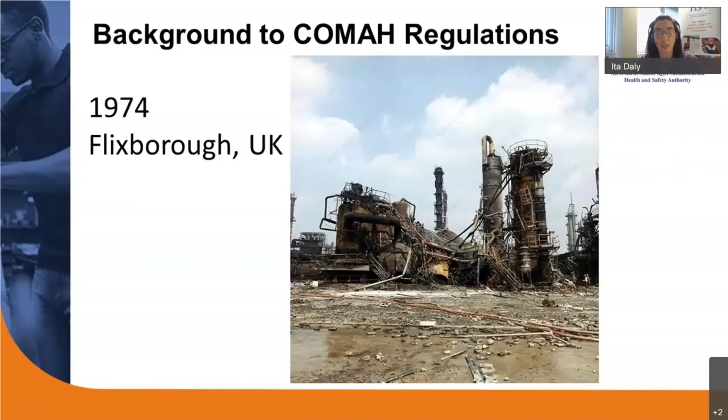In 1976, at a chemical plant near a town called Seveso in Italy, a dense vapor cloud containing dioxin, which is both poisonous and carcinogenic, was released, resulting in more than 2,000 people being treated for dioxin poisoning and the contamination of 10 square miles of land and vegetation.

Events such as both of these incidents prompted the adoption of legislation on the prevention and control of such accidents in Europe, and hence came the so-called Seveso I directive. The Seveso I directive was then amended in view of the lessons learned from later accidents, such as in Bhopal and Mexico City, and this brought about the Seveso II directive, which introduced new requirements for land use planning.

So the protection of residential and other populated areas likely to be affected by a major accident is a key aim of the Seveso directive. It also covers the safeguarding of environmental receptors. The directive sets out that member states should ensure that the objectives of preventing major accidents and limiting consequences of such accidents are taken into account in their land use policies.

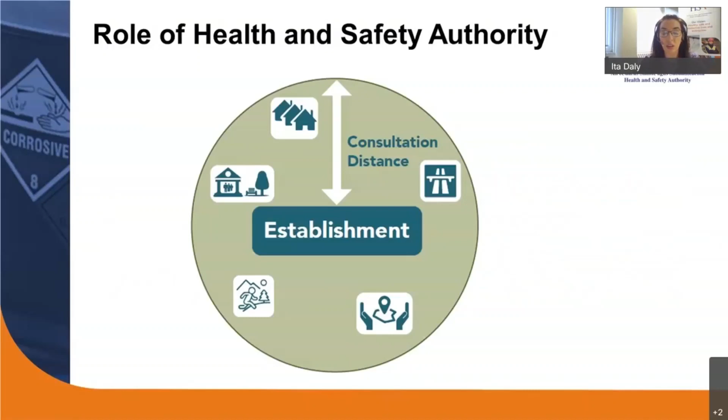I spoke about the directive requiring appropriate distances between establishments and certain receptors. It requires the HSA to set and review a distance around each establishment, called the consultation distance. In essence, it's a protective zone around a COMAH establishment to ensure the risk to human health and the environment is minimised, especially for the developments I outlined already - residential areas, buildings and areas of public use, recreational areas, and so on.

Once this consultation distance is set for an establishment, it then must be formally communicated to all relevant planning bodies. In 2021, the consultation distances for all establishments were reviewed and updated, and details of the revised consultation distances were sent to the relevant planning authorities and to site operators in the form of a GIS file.

It is important to point out that this risk figure is based on the inventory provided in your COMAH notification. Therefore, if there are modifications on a COMAH site, including changes to the quantity of dangerous substances, it is vital that these modifications are communicated to the authority through the significant modification process.

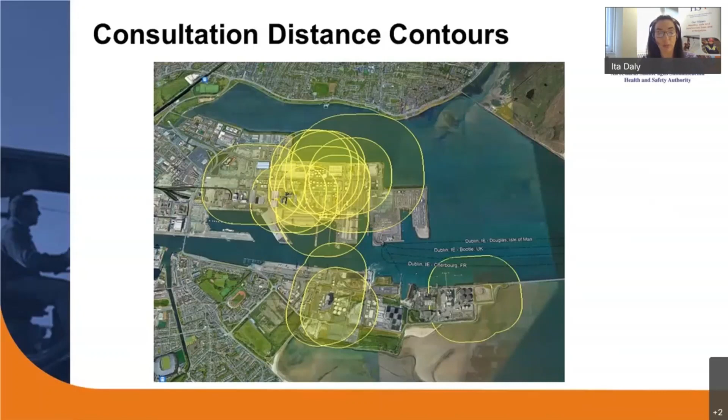Once a planning body has been informed of the consultation distance around a site, they in turn are required to seek technical advice from the HSA for certain types of proposed development within the consultation distance. These types of proposed development are set out in the planning and development regulations, and they range from the provision of housing to schools, hospitals and creches, to commercial, industrial or office development for 20 or more employees.

And as well as new developments, the requirement for technical advice also extends to new development on a COMAH site, or for permission for a new COMAH establishment.

European best practice advises that a technical land use planning advice system should apply the principles of consistency, so the outcomes from broadly similar situations are broadly the same under similar conditions. Proportionality, so again, the constraint should be proportional to the level of risk. And lastly, transparency, so an understandable, clear and well-described decision-making process should exist.

Best practice also requires that account be taken of the most recent technical knowledge. The system set out in the new guidance document adheres to these principles and also takes account of recent publications at an EU level, along with taking account of any relevant technical knowledge in the provision of technical land use planning advice.

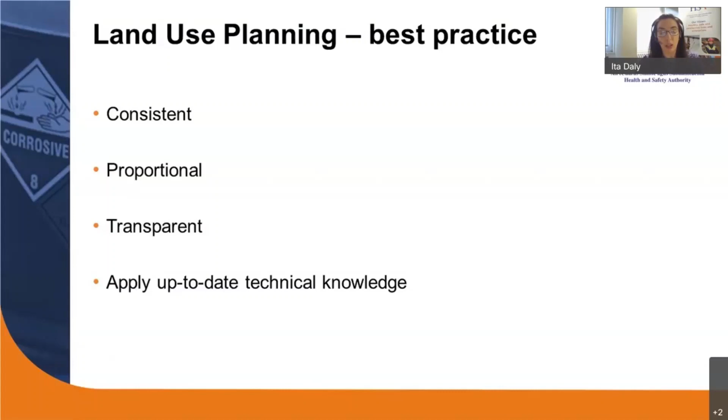Now that we know the process around how land use planning is managed, I want to cover how the technical advice is formed and provided to the planning authorities when requested.

So first, let's look at new establishments. This covers the siting and development of newly constructed COMAH establishments, but it also includes sites of existing operation where the COMAH regulations did not previously apply, but now such a site intends on increasing their inventory of dangerous substances above the COMAH thresholds, thereby bringing them within the scope of the COMAH regulations.

In keeping with the longer-term aims for land use planning under the Seveso directive, technical advice in relation to new COMAH establishments will be more stringent than that which applies to existing COMAH establishments.

However, even if these individual risk criteria are met for a specific development, a societal risk evaluation may also be necessary, and I'll cover societal risk in more detail in a moment. In addition to the advice given to planning bodies, a new establishment may also include an advisory to consult with the principal response agencies in relation to emergency planning and response arrangements.

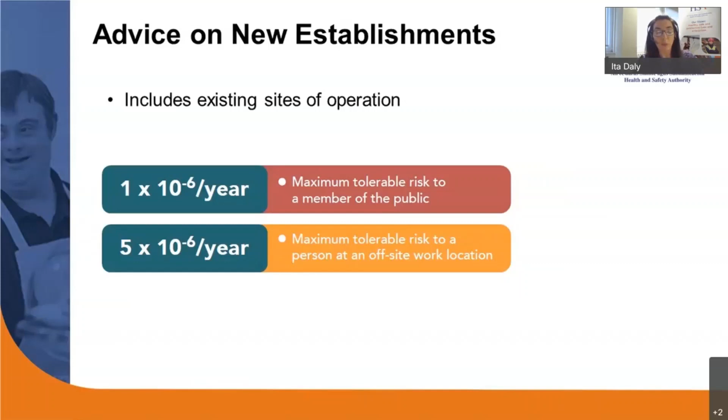Moving on to advice on significant modifications to an establishment. As you are aware, the authority have already published guidance on significant modifications in 2019. In summary, the HSA regulates the on-site risk element, setting limits for the tolerable level of risk increase that will be permitted, and generally requiring the lowest level of increased risk through the use of additional technical measures. For off-site risk, the referral trigger is an off-site location fatality risk equal to or greater than 1 by 10 to the minus 6 per year, and it will then be referred to the planning authority.

The HSA must always be notified by operators in advance of any planned significant modification, and the procedures outlined in the guidance on significant modifications under the COMAH regulations must be followed, irrespective of whether or not a modification will be subject to a planning application. And we will use the data and documentation submitted in the significant modification process when providing technical advice to a planning authority.

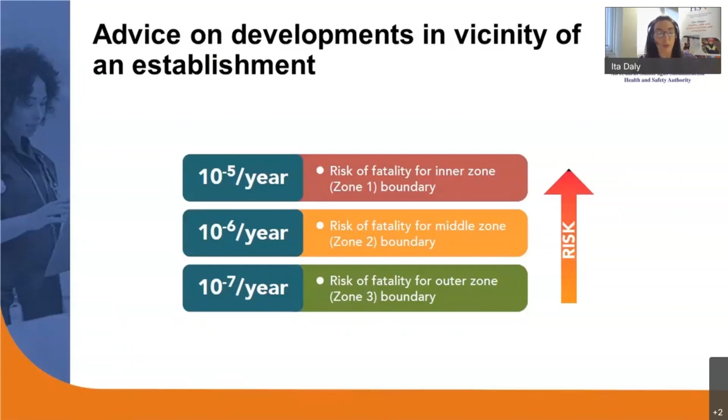Associated with each of these 3 zones are 4 levels of development. These levels are set out in the top table on the left, with level 1 being the least sensitive, increasing to level 4 for very large or sensitive development. The full text of the development sensitivity levels are set out in Appendix 2 of the new guidance document, but just to give a general sense, Level 1 covers people at work and parking areas. Level 2 is for development for use by the general public, such as housing, hotels and transport links.

Level 3 covers development for use by vulnerable people like hospitals, schools and creches, sheltered housing, nursing homes. Level 4 then is for very large and sensitive developments, things like larger scale hospitals and education settings, and very large outdoor public use spaces such as theme parks, sports stadia, and so on.

When the sensitivity level of the development has been determined along with the location within either zone 1, 2 or 3, the table on the bottom right of the slide gives an indication of what the authority's advice would be to the planning authority. You can see that sensitivity level 1 development would not be advised against in any of the 3 zones, but sensitivity level 4 would be advised against in all 3 zones. This system is based on individual risk, that is, the risk to a person permanently located outside the establishment.

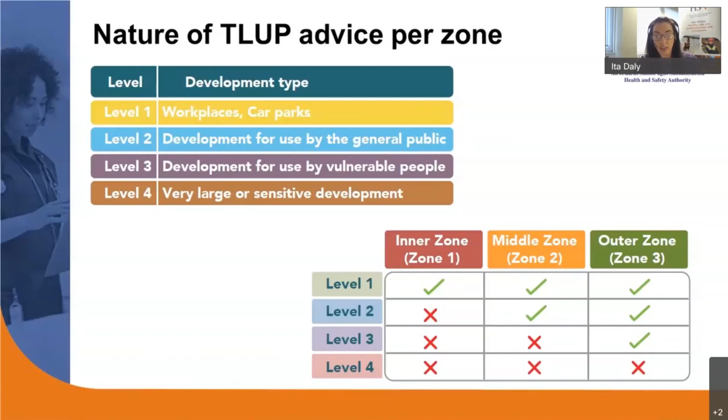However, there are times where the risk of multiple fatalities from an accident, or societal risk, should be taken into account more explicitly. For example, this may include where a planning application relates to a proposed significant off-site development with significant population density, or where there is already a significant population residing or working within the risk zone, or where the risk is emanating from more than one establishment.

To take account of societal risk in such situations, we will initially obtain an estimate of the expectation value. The expectation value is a multiplication of accident frequency, expressed in chances per million, and the number of people suffering a fatality in that accident. Societal risk is covered in more detail in section 1.7 of the new guidance, and in general, the expectation value should not exceed 10,000. If it does, the advice to the planning authority would always be to advise against the development.

Especially large-scale or sensitive development within the consultation distance will likely require societal risk evaluation, and the societal risk criterion is applied in addition to the individual risk criteria we previously outlined.

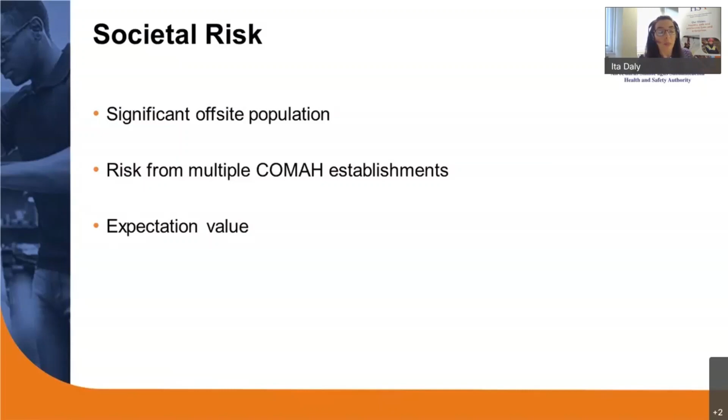Just to touch on the environmental aspects, in the context of land use planning, the prevention of MATTEs will be the primary objective, and accident pathways are expected to be prevented. Where this is not practicable, or in the context of significant modifications at existing COMAH establishments, the assessment of major accidents to the environment focuses on the specific risks to sensitive receptors within the local environment, the extent of consequences to such receptors, and the ability of such receptors to recover.

So environmental damage may be relatively long-lasting, but it is not necessarily irreversible. The recovery of habitats within a reasonable period of time is possible, depending on the dangerous substance involved, and this information can then be weighed up when providing advice.

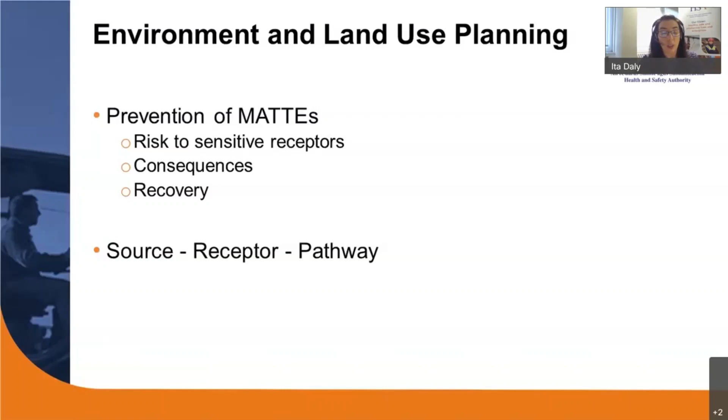The full detail relating to land use planning and the environment is contained within section 1.8 of the new guidance document. Just to touch on the public information zone.

Prior to the COMAH regulations of 2015, the specified area was defined as an area at greater risk of being affected by a major accident, within which an upper tier establishment had to supply information directly to persons in that area on the appropriate action to take in an emergency.

So whilst this area still exists, it is no longer referred to as the specified area. The requirement to provide this information still applies under the 2015 COMAH regulations, but this area is now to be known as the public information zone.

This zone will, at a minimum, coincide with the outer land use planning zone, and the HSA will use its discretion as to whether it should be enlarged further based on the consequences of the identified major accident scenarios for the site.

Existing specified areas will continue in use as the public information zone until they are replaced, which will happen as generic land use planning advice for each establishment is rolled out to planning authorities. And that leads me on to my last slide now, covering the development of such generic advice.

So the authority plans on preparing generic land use planning advice for all COMAH establishments. This generic advice will be based on the data provided in your COMAH notification and will include development of the 3 risk contours for inner, middle and outer zones I described earlier. Once completed, this generic advice will then be provided to the relevant planning bodies.

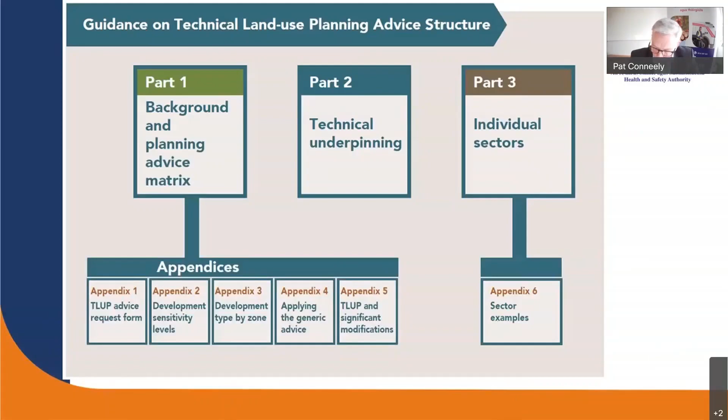Part 2 sets out the technical underpinning of the method, while part 3 describes how it will be applied in the different sectors. Reiterating what Ita has said, the ultimate aim of all this is to provide generic advice contours around each COMAH establishment, and that will be supplied to the planning authorities, and they can use that for the future control of development around those sites.

A key element of the approach is the estimation of the consequences of exposure to a hazardous agent. The method employed relies on the use of Probit Equations to address this question, and here are 3 Probit Equations. The first is for chlorine toxicity, and the Probit provides a lethality value for exposure to chlorine gas. It depends on the exposure concentration, C, and T, the exposure time in minutes.

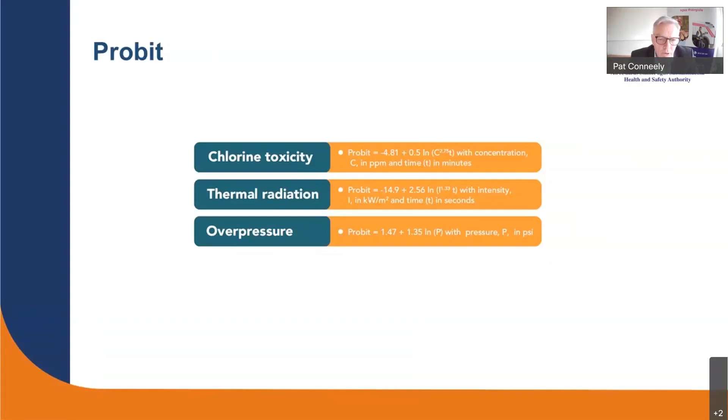As you can see in that equation, the concentration has a big impact on the Probit value. The second Probit is for fatality from exposure to thermal radiation. The heat intensity is represented by I, and the duration of exposure, in this equation in seconds, is represented by T. The final Probit is for fatality from overpressure. Here, the value depends only on the intensity of the overpressure, and there is no time effect on that.

So the utility of these Probit functions and values is that from specific exposure scenarios, we can obtain values that can be translated to fraction of fatality experienced in an exposed population. This is really useful when trying to convert estimated exposure consequences to a risk of fatality, which is required to generate the land use planning risk contours.

The Probit used for thermal radiation effects on people was derived by Eisenberg in 1975. Most of the probits used in the method have been obtained from the Dutch National Institute of Public Health and the Environment, RIVM for short in Dutch, and that's from the reference manual of BEVI risk assessments.

BEVI refers to the External Safety of Establishments Decree, so it's similar to our own COMAH regulations. It describes the approach to such risk assessment in the Netherlands, and we have drawn heavily on that for our own guidance, as we have on the approach of the UK HSE, particularly in relation to the matrix of advice and in developing our overall method.

One of the more notable changes we've made in the revised guidance is to change the standard exposure time to pool fire radiation from 75 seconds down to 60 seconds. The same Probit is used as was previously used, but the assumed exposure time has been reduced. The previous exposure time was considered to be overly conservative when compared with both the UK HSE and the Dutch approaches.

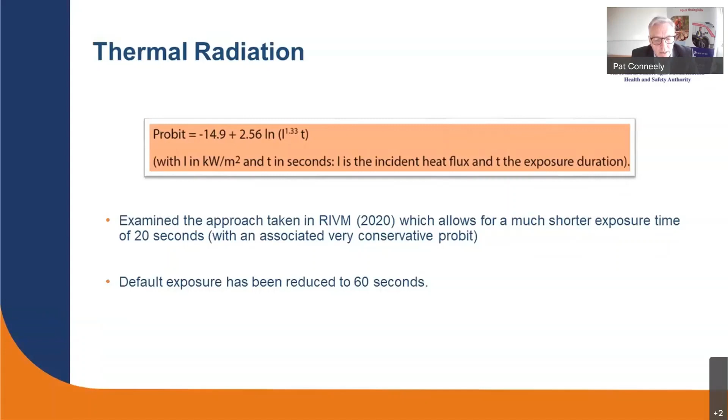Now that does have knock-on effects on the levels that might be used for consequence modelling, as shown here, because they have increased. For 1%, it's from 6.8 kilowatts per metre squared up to 8. For 10%, it goes up to 10.9. And for 50%, it goes to 15.9.

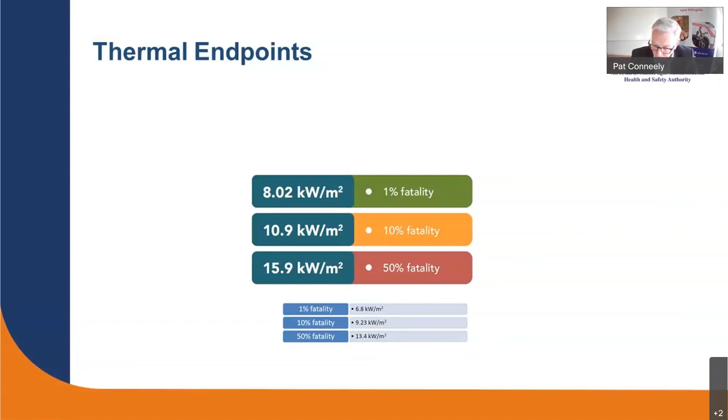Of course, thermal effects are mitigated by the shielding effects of being within a building separated from the source. The values used in that context are unchanged from the previous version, and generally exposure duration is not an issue for these endpoints.

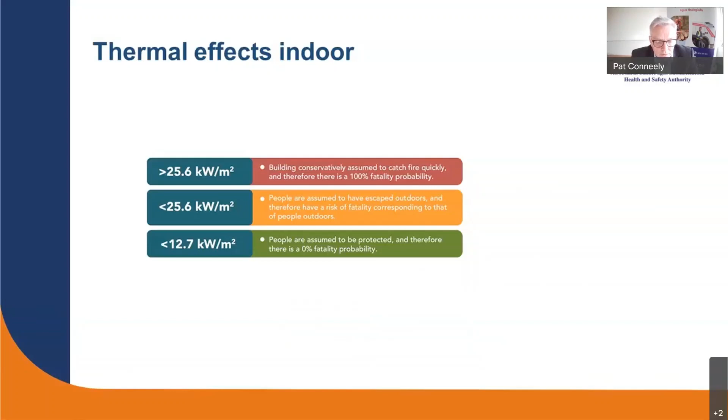So if I go to look at overpressure now and the Probit for that, we can see that when it comes to overpressure from explosive events, the approach is the same as in the previous version, and the same probit is used.

For vapor cloud explosions, or VCEs, the standard model makes the assumption that 20% of the stoichiometric cloud volume is in the confined area, provided there is some confinement present. If the confined volume is known to be greater, then that volume is used, and it will be modelled at strength 7 using the TNO method, while the remaining unconfined cloud will be modelled at strength 2.

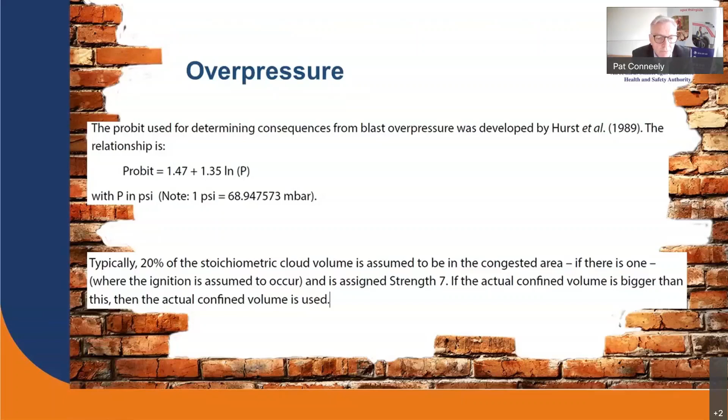So here are some landmark overpressure levels with associated fatality levels, and they're all unchanged from the previous version.

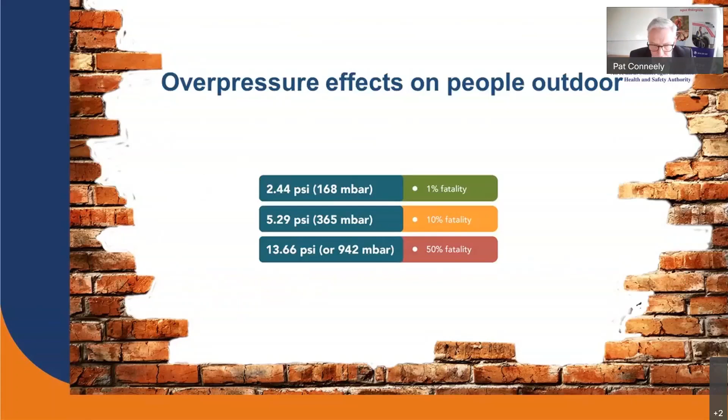When it comes to protection or lack of afforded by buildings, the Chemical Industries Association approach is followed as it was in the previous version. Typically for residential buildings, the value from CIA curve 3 is used to derive fatality levels within buildings.

The graph included in the guidance also includes curves from the American Petroleum Institute. The methodology there is to look up the overpressure along the x-axis until the point it hits the curve, and then go across and meet the fatality fraction on the y-axis.

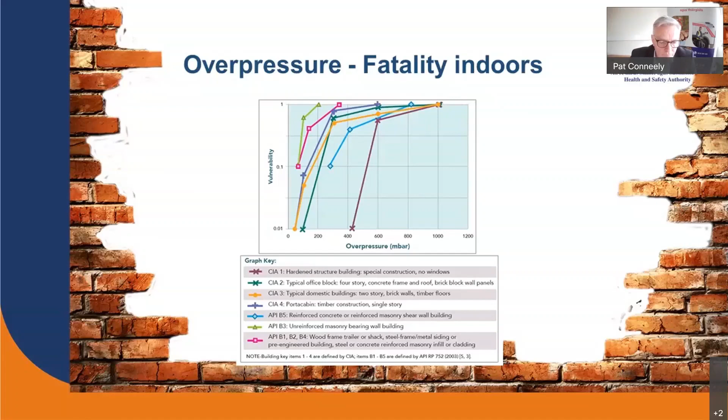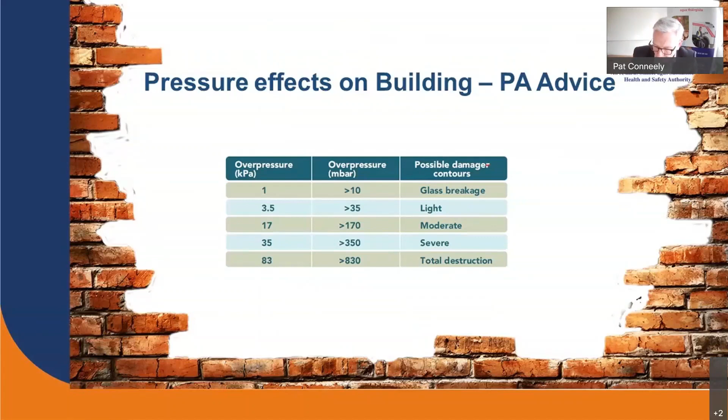It is also intended to provide some consequence advice to planning authorities along with the risk contours provided in the generic advice. So for damage to buildings from overpressure, some of these contours could be included, most likely for glass breakage or light to moderate damage, for very unlikely, and therefore outside the standard contours, but still possible accidents. Because it's important that planning authorities are fully apprised of the consequences of major accidents, as well as the risk.

And of course, in that context, the draft guidance went out to public consultation earlier in 2021. And we received a lot of constructive feedback at that point, most of which we have tried to incorporate into the guidance, but more on that later.

Now, part 2 of the guidance also contains some other important modelling parameters to be used in the standard model. Modelling temperatures are now specified at 15 degrees for daytime conditions and 10 degrees for nighttime conditions, so that's new. Atmospheric stability conditions are specified as D5 for 80% of the time and F2 for the remaining 20%, so that's as before. Wind direction is accounted for by taking account of the nearest weather station and using an 8-sector probability fraction. In the standard model, receptors are assumed to be indoor for 90% of the time, so 10% outdoors, as before. Being indoors will, in most situations, offer protection. Local terrain will also be accounted for with the surface roughness of 0.1 used by default.

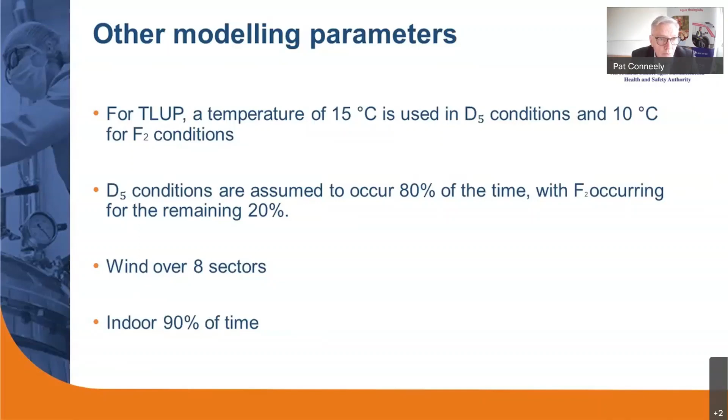Now, in the provision of land use planning contours, environmental effects are actually not usually relevant, certainly not for existing establishments. In relation to the siting of new establishments concerning the environment, the emphasis is always on preventative measures, usually around containment, but separation distances could also be relevant. In this context, the toxic endpoints for humans may be sufficient, but sometimes a more sensitive endpoint may be necessary. The choice of endpoint will depend on the data that may be available, and sometimes surrogates would have to be employed. When examining environmental context, damage and consequences, damage duration and receptor resilience are also factored in.

In modelling, pool size is also an important factor because these will influence the evaporation rate and also flame height calculations for pool fires. The maximum diameter used for a pool will be 100 meters, provided that area is available. If physical restrictions mean that only a smaller size is possible, then that will be used.

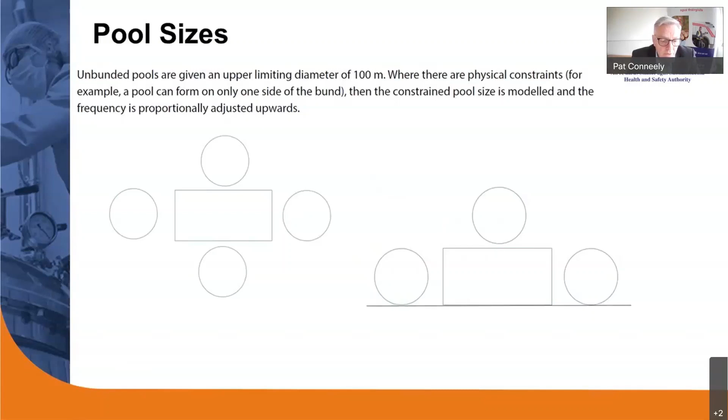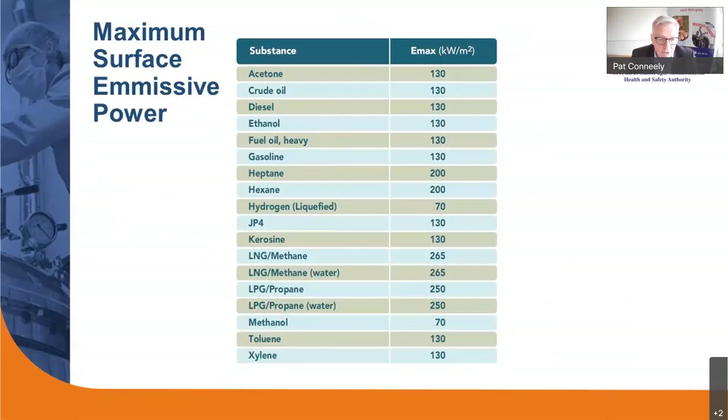A fresh approach has been taken for estimating thermal radiation from pool fires. In the 2010 document, values for surface emissive power of flames for surrogate Class 1 and Class 2 flammable liquids were included. The current guidance does not include those, so that's an important change. It does include a table of maximum surface emissive powers for a variety of common flammable liquids. However, these values are maximum values, and some attenuation is necessary when estimating the flux experienced at a receptor.

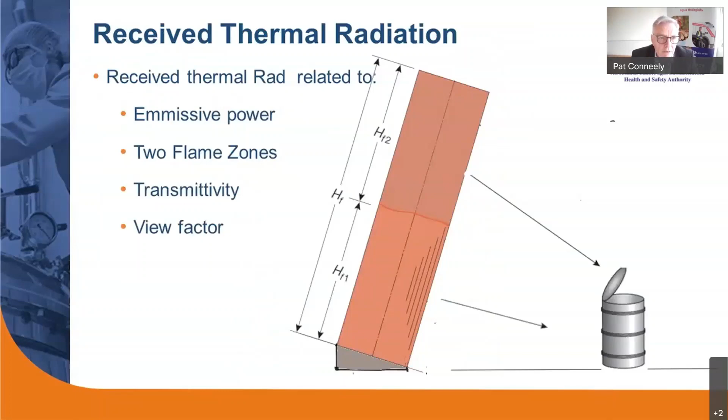The preferred standard consequence model approach is to use a 2-zone flame model to take account of smoke obscuration, which typically occurs in an upper zone. The distance to the receptor and the view factor to each flame zone is taken into account, as is the atmospheric transmittance. So this will yield a more realistic thermal radiation level, which would be calculated on a case-by-case basis.

Flammable liquid classification now follows the classification, packaging and labeling regulation approach. A bridge graphic from ECHA's CLP guidance is included in our guidance so that the clear links between flash point and boiling point and flammable classification are clear. It's flammable liquid categories 1, 2, and 3 that are followed here.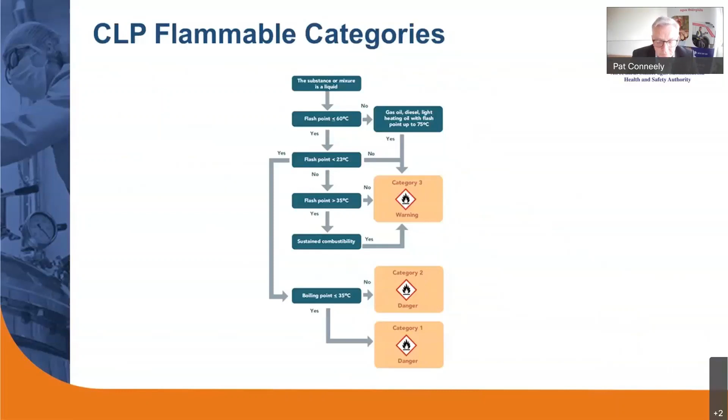In our experience, ignition probability has been the source of dispute in land use planning advice and contention. So the guidance now includes ignition probabilities for use in the standard model.

As you can see there, the flammable liquid categories are assigned to an ignition category, from 0 to 3 as shown in this graphic. For flammable categories 3 and 2, that's relatively straightforward - a straightforward mapping. But for flammable category 1, there's a subdivision into 2 ignition categories, and the substances that have the lowest flash point go into ignition category 0.

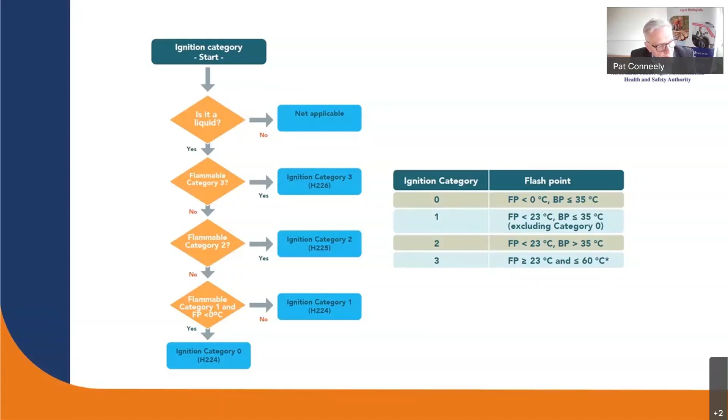This leads on to the assignment of ignition probabilities, and as you can see from this table, ignition is assumed to be either immediate or delayed. Class 0 high reactivity refers to the most flammable of gases. Class 0 low reactivity refers to gases like methane, and also is being used for ignition 0 flammable liquids. Then we have the other flammable liquids as shown. By the time we get down to category 3 flammable liquids, the ignition probability is 0. This is quite a change from the methodology in the previous version of the guidance, and allows a lot more discrimination in relation to the type of flammable liquids stored on the site.

We've also included values that specifically relate to transport units, using a similar type of methodology. And also ignition probabilities specifically for flammable releases at jetties, for example - that's also the first time that's appeared in the guidance. So a very comprehensive list of ignition probabilities is provided.

As you will shortly see, the delayed ignition probability refers to the delayed ignition branch of an event tree. But an allowance is sometimes made that some sub-branches will not result in fire or explosion, so it doesn't definitely mean there will be an explosion event consequent on that. That's in line with the approach in the BEVI itself, and also the methodology used in the Flemish region of Belgium, which is widely admired and followed elsewhere. Hopefully this will all become clear when I look at event trees a bit later on.

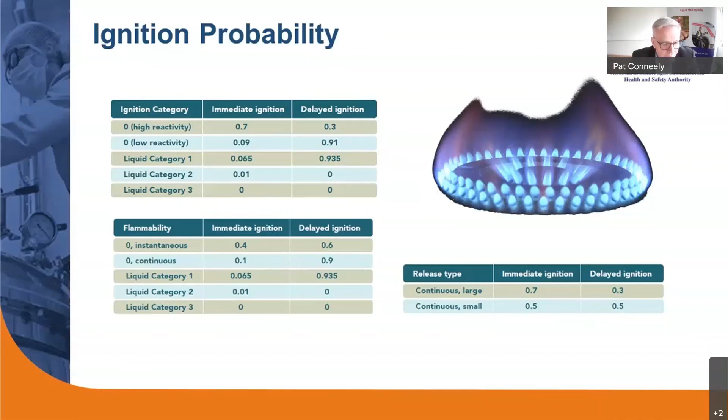If I might just pause there, I've come to the end of my overview on part 2 of the guidance, and we've set out the approach to land use planning. It's fatality based, and so I've tried to pin down in part 2 the values of the variables in deriving that, to ensure a consistent approach is taken erring on the conservative side. The guidance sets out the standard approach the HSA will take in deriving generic land use planning contours for planning authorities. So the final piece now is to identify the appropriate scenarios and their likelihood.

That's what part 3 of the guidance does. I will try to highlight the approach taken without going into every detail. Obviously, it's an extremely detailed document, and this part in particular is detailed - there's over 200 scenarios listed in part 3. I'll point out where the more important changes have been made.

For this part, inspiration has been taken from the BEVI with some tweaks here and there. I want to emphasize this will be the standard approach to generating generic contours around existing establishments for planning authorities, and does not preclude a more specific QRA in the appropriate circumstances. Such QRAs should use coherent and consistent data. The authority exercises absolute discretion in deciding whether to accept such data.

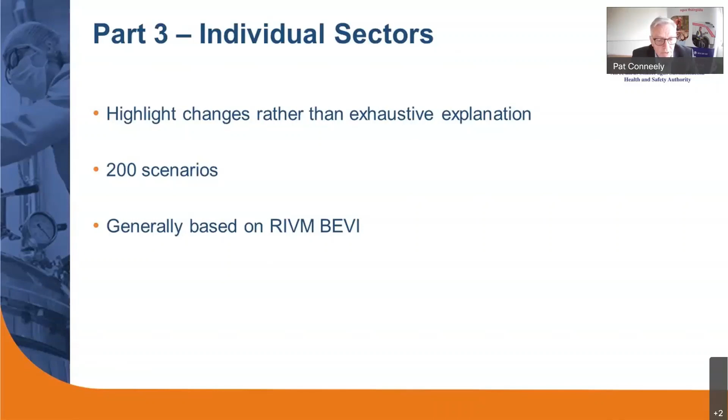The first sector I want to look at is LPG, and I will use it to illustrate the general approach. There's an event tree shown there, which is from the BEVI, and before that it appeared in the purple book, and it's for an instantaneous release of flammable gas. You can see the sub-branches for immediate and delayed ignition, and note also that some branches could result in no effects from delayed ignition.

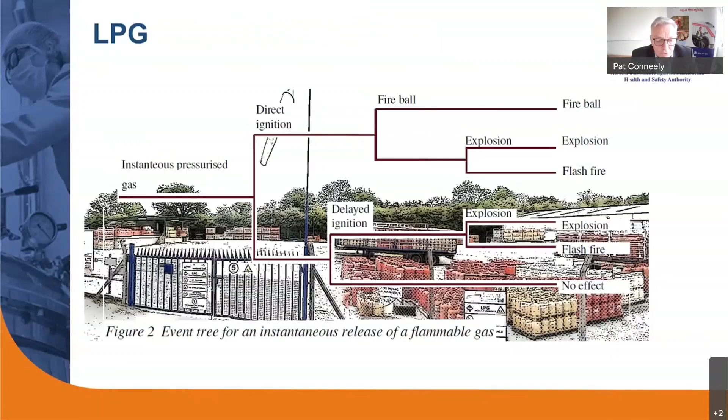So the nuts and bolts then. Here is the event tree that was populated for that instantaneous release scenario. You can see the ignition probabilities for the various branches, and that some end with no effect. LPG is highly flammable, and so is in ignition category 0 high reactivity. That means an immediate ignition probability of 70% and a delayed probability of 30%.

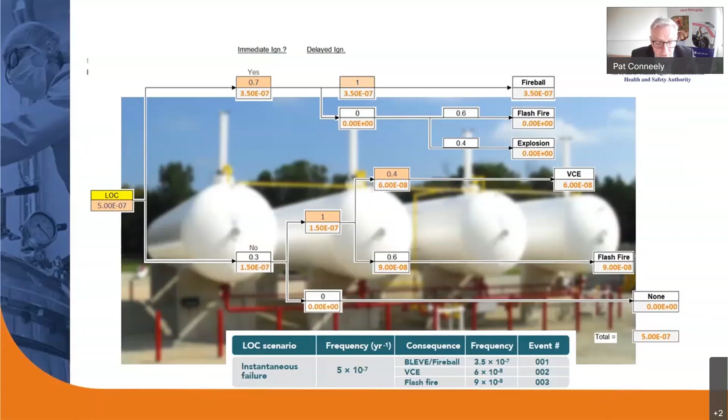At the bottom of the slide, you can see how that event tree information has been transformed into part of table 23. You can see the full table here, and the data from that is taken from 3 such event trees.

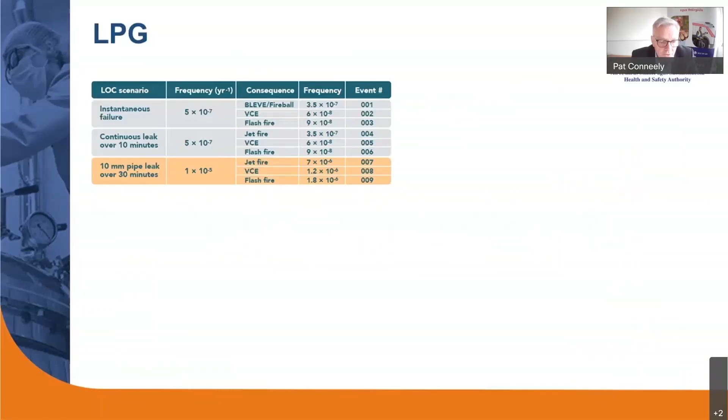A similar approach yielded the tables for the other scenarios. For the 10 millimeter scenario, highlighted in orange in the first table, that means those scenarios may only be relevant close to the establishment boundary. You will see that approach taken in some other tables. We made these and other changes following the public consultation, where we received comments that there were too many scenarios and requesting that we just try to reduce the number.

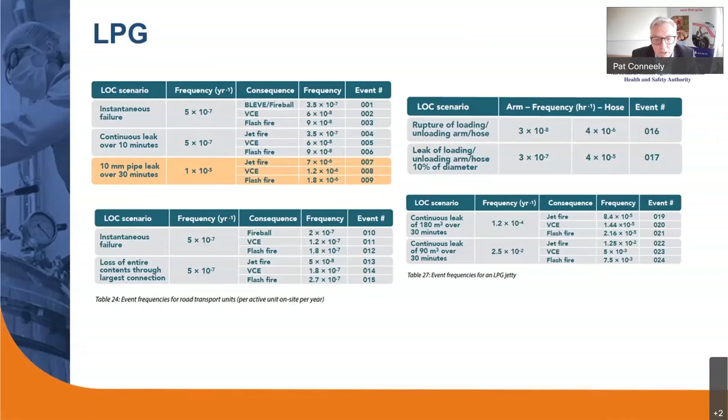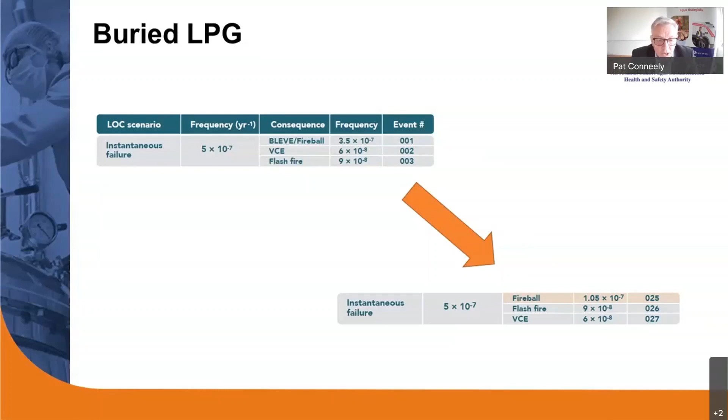So I'll push on now to the LNG sector, which is new and developing, and again it's a new sector in our guidance. Using inventories and the ignition probabilities in part 2 of the guidance, similar tables were obtained for this sector. Because of the potential release conditions for LNG, it's stored typically at minus 160 degrees Celsius and may or may not be under significant pressure, depending on how it's going to be used. So pool fire frequencies are greater than for LPG and BLEVE frequencies are less.

This section of the guidance is directed at smaller scale use of LNG because we have encountered a number of those arrangements at existing energy consumers and suppliers. But it doesn't cover larger facilities, particularly floating gas, floating storage regasification units, floating storage units (FSUs), and the like. So it's very much geared for the typical user or possibly supplier arrangement that we find at the moment.

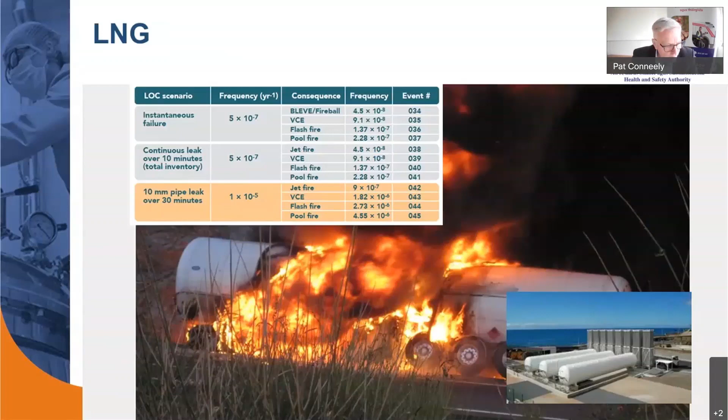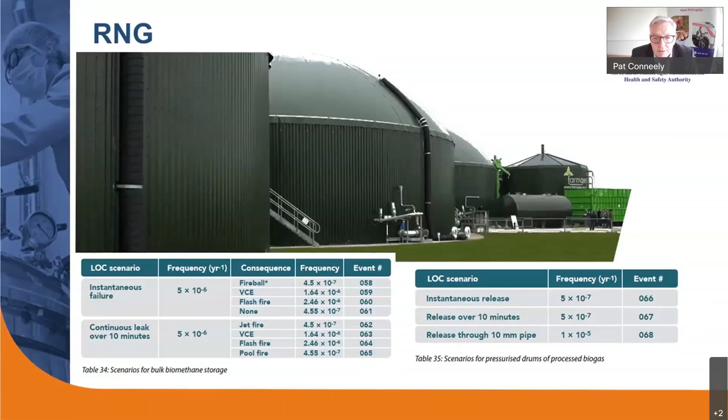The hydrogen sector has also been added for the first time, and it's really in there as a placeholder at the moment until we see how the technology develops. Hydrogen is a flammable pressurized gas, so the scenarios for flammable gases and for drums and cylinders in other sectors will be relevant and can be drawn on if more specific data is not available. But the guidance is intended to be updated once the technologies become clearer.

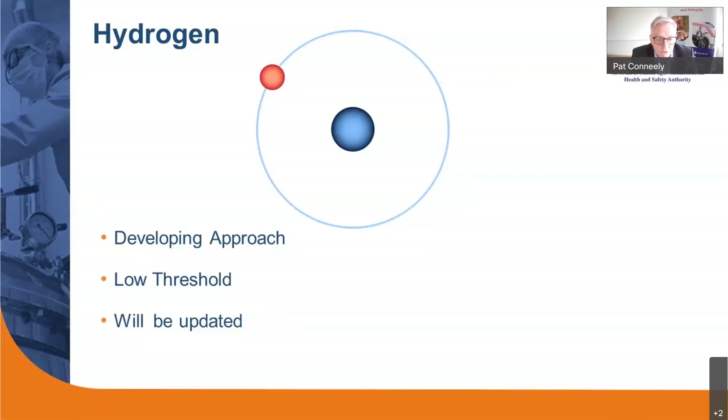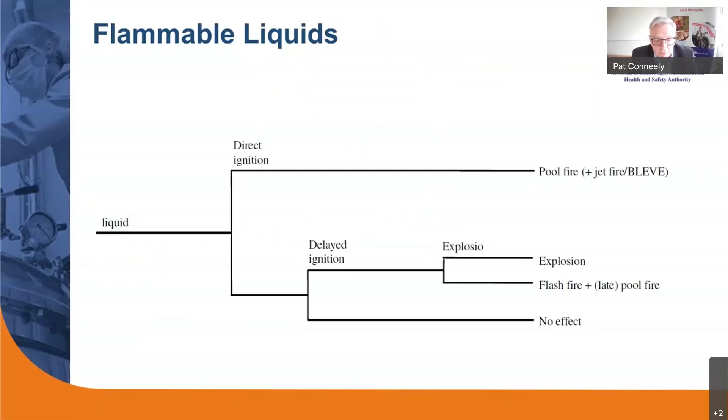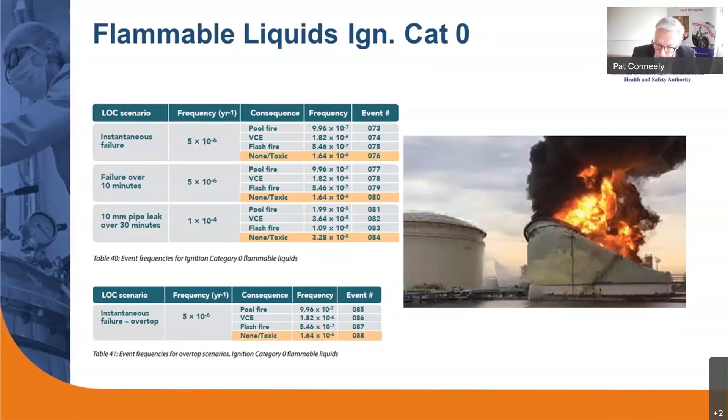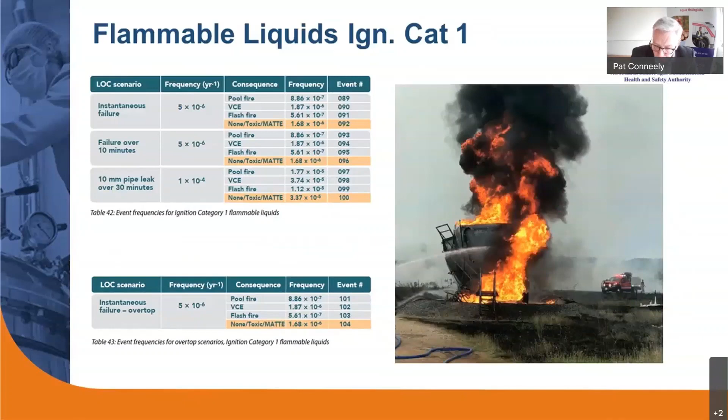Second table, sorry, yep, I moved on there. So by the time we reach ignition category 2, then we're just modeling pool fires.

And of course, they're at a reduced frequency. And we also include the potential for toxic or MATTE events as well. And then when we move on to ignition category 3 liquids, fire and explosion events are not relevant unless they are co-located with the more flammable liquids. So again, that's quite a big change from the existing guidance.

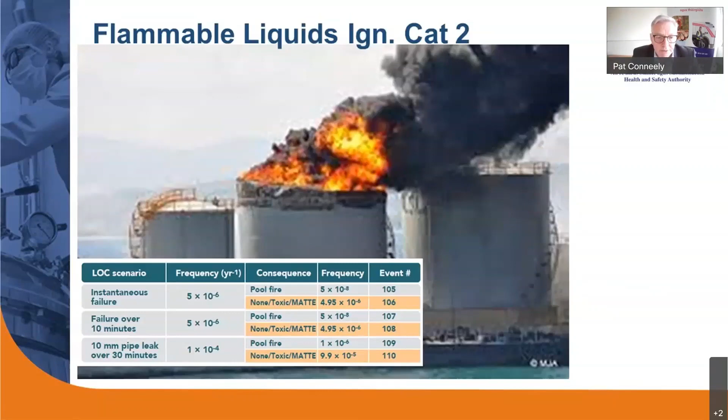Another innovation for this sector is the provision of detailed loss of containment scenarios for road transport units at an establishment. Again, modelled events and frequency depends on the flammable and ignition categories.

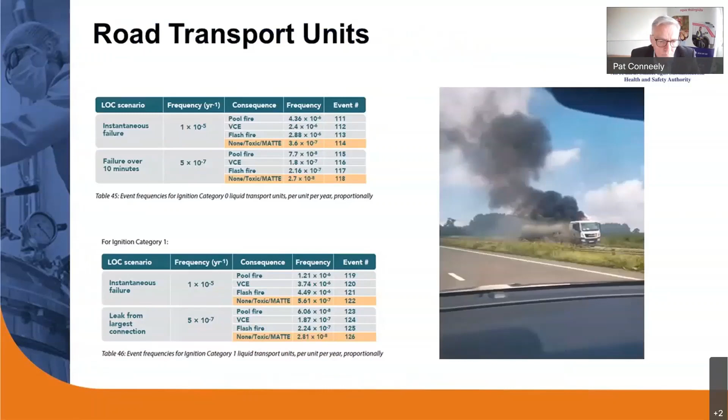So I'll just take you through now the derivation of the tables for some road transport units. So we started with the basic BEVI event tree and used the ignition probabilities for road transport units in part 2 of the guidance.

We also make allowance that there's a probability that some events will not result in fire or explosion. I also want to point out something else on this tree. You recall I mentioned previously that following the public consultation, we made an effort to reduce scenarios where we could. So, for example, we've done that here, and maybe in lots of other trees as well, where we've combined early and late pool fire scenarios into a single scenario.

So as you can see, the arrows there showing the total pool fire probability is 4.36 by 10 to the minus 6. So if you actually come in and just look at the tables and try to maybe reverse engineer them, you might find that the numbers don't add up, and that's the reason why that's the case.

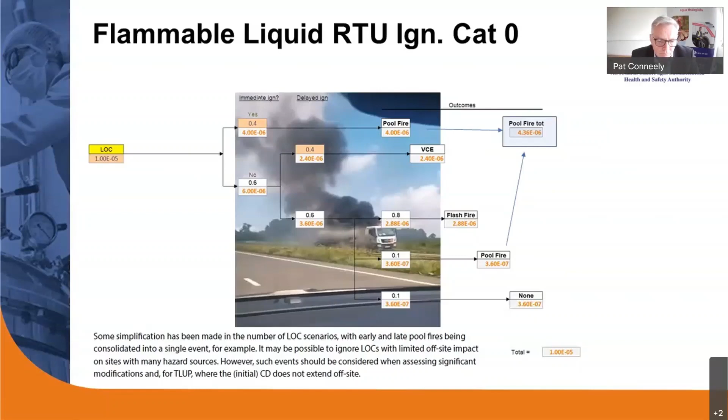And again, just to illustrate the complexity involved in producing those simplified tables, let's look at the instantaneous failure of a tank containing flammable liquid category 1 and ignition category 1.

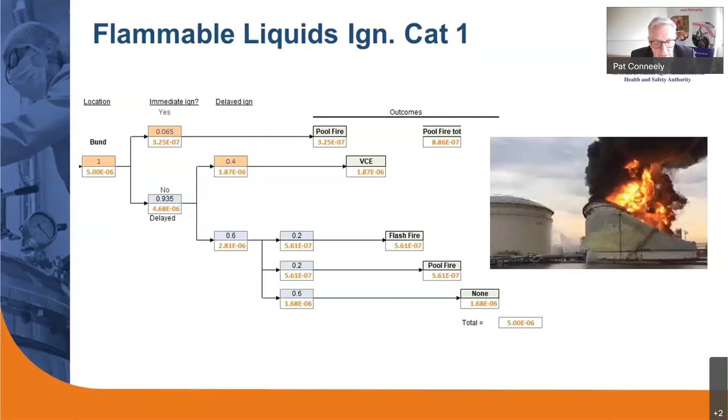Two trees have to be considered here, one for the spill in the bund and one for the overtop event. This is the bund event tree. The ignition category 1 ignition probabilities are used.

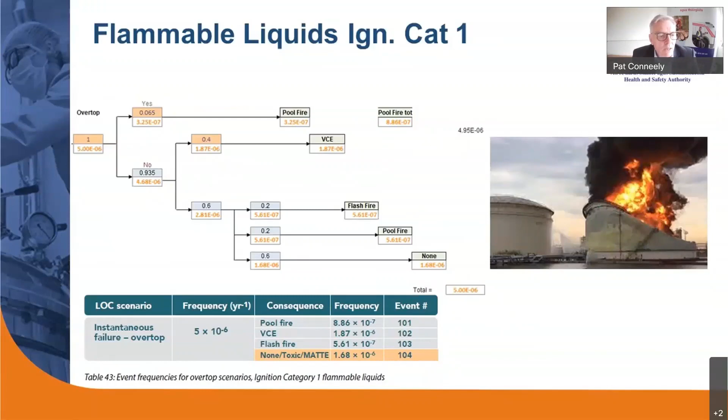And as you can see, these have been reproduced in that part of the table, describing the instantaneous failure event. And similarly, for the overtop event tree and the resulting table. So you can see there's a lot behind those simplified tables in the guidance.

So now I'll just move on to the next sector, and that's the fertilizer sector. And there has been a significant enough consolidation of methods for this sector, and a single approach is specified. It's explicitly stated in the guidance that it applies only to ammonium nitrate named substance 2 fertilizers, which is the type of fertilizer we usually encounter in Ireland.

Model scenarios will be for fire and explosion on trucks and in the yard, stacks stored in the yard, and for bulk storage in warehouses. 300-ton explosion events are included, but they're at a very low frequency.

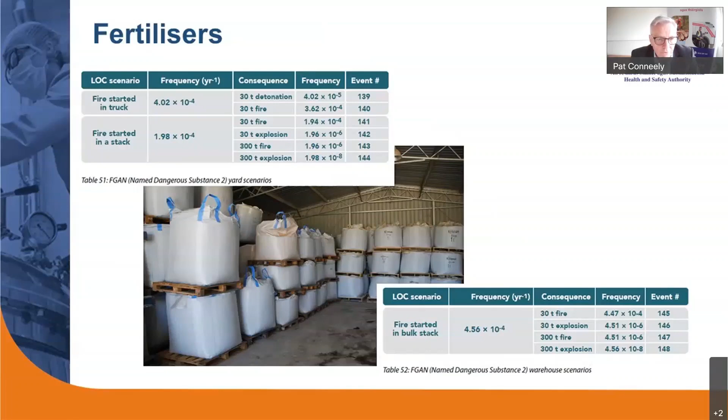For dangerous substances warehouse, there haven't been too many changes for that sector. One point to note is that now there is a clear allowance for frequency reduction for small and large warehouse fires where sprinklers are installed and operational.

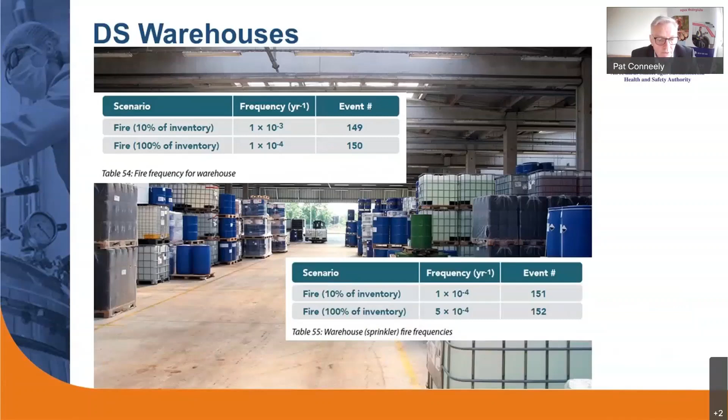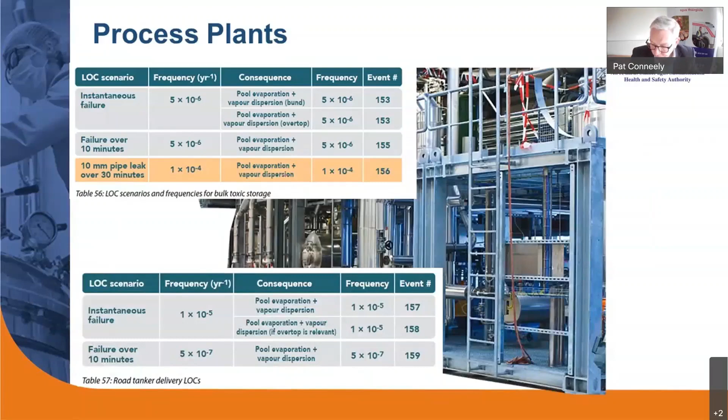For process plants, a table of loss of containment events involving bulk storage of toxic liquids, which was absent in the previous revision, has now been added. Also, events involving road transport units have now been specifically included. And the approach to process vessels has been set out.

The guidance recognises that releases may occur at elevated temperature and or pressure. A simplified approach ignores explicit consideration of the many sources of potential release, pipes, pumps, compressors, heat exchangers, and so on, and instead increases the frequency of releases from the process vessel.

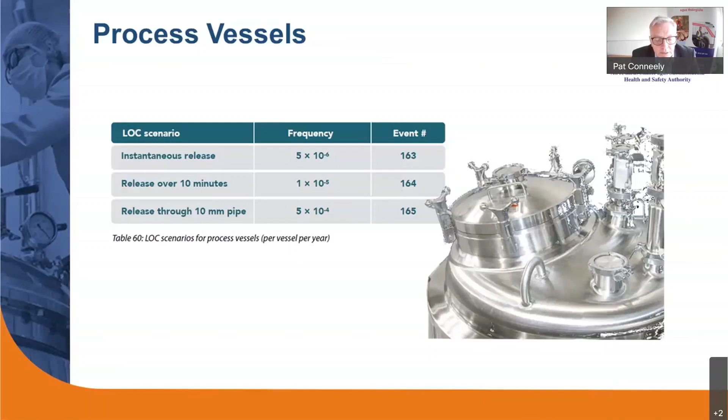The loss of containment figure for a vessel can be multiplied by the number of active vessels in the reactor hall or building. And an increase in frequency is also made for vessels carrying out exothermic reactions.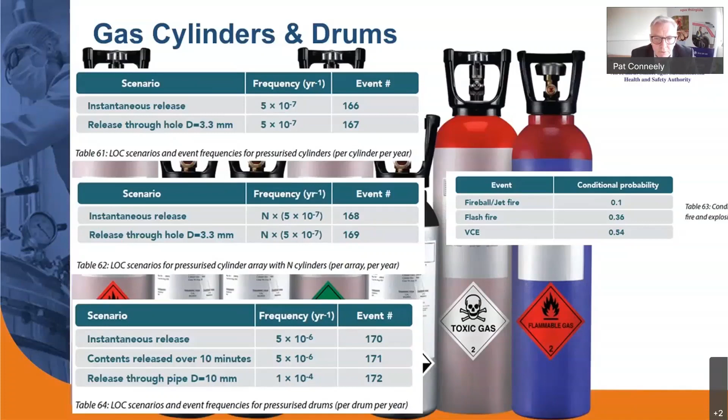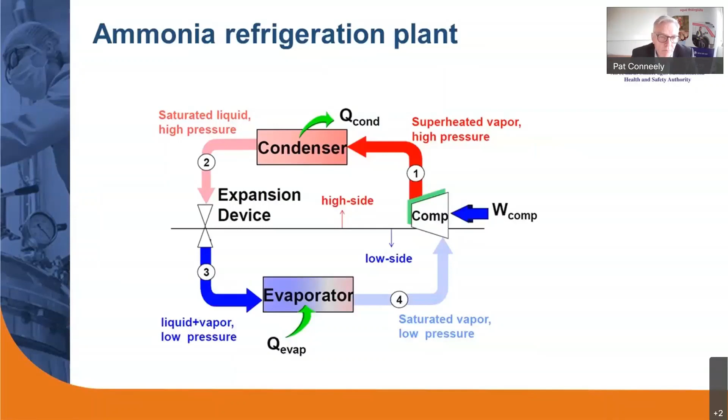Ammonia refrigeration plant has been included for the first time. And given the different phases in the refrigeration process with high and low pressures and high and low temperatures, finding a simplified approach for the standard LOC model was not easy. But we did identify a reasonable approach, which is spelled out on this slide.

It involves an ammonia spill in pipework external to the building, so outdoors, at a temperature of minus 12 degrees Celsius, and with the maximum pool size possible of 100 meters diameter. And the probit then for the toxic would be taken from the toxic probit table that I referenced earlier, table 16, and that would be used then to establish the fatality levels in D5 and F2 conditions.

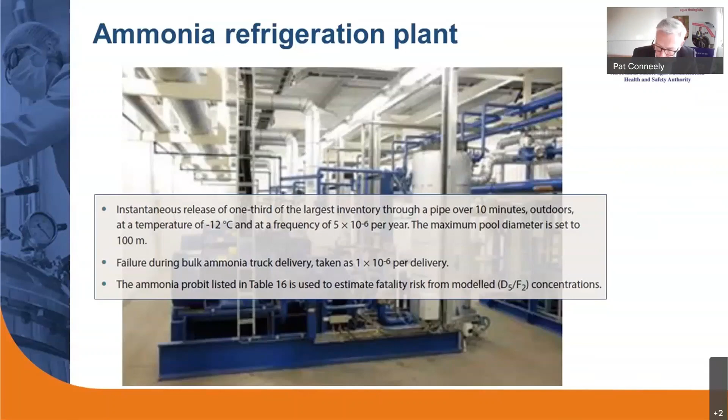Distilleries and spirit maturation warehouses are explicitly included for the first time in the guidance. However, the approach to modelling ethanol fires is not firmly established.

Recent publications, including a Swedish study and a Health and Safety Executive research project, have indicated that the surface emissive power for ethanol is greater than for gasoline. And as it burns with a clear flame, the level of soot obscuration is probably minimal, so a high surface emissive power is assumed in the standard model.

On the other hand, allowance is made for aqueous solutions and cask strength whiskey, which are obviously of much lower strength than 100% ethanol, and that has to be factored in. Warehouse fires are modelled conservatively due to the uncertain contribution of wooden casks.

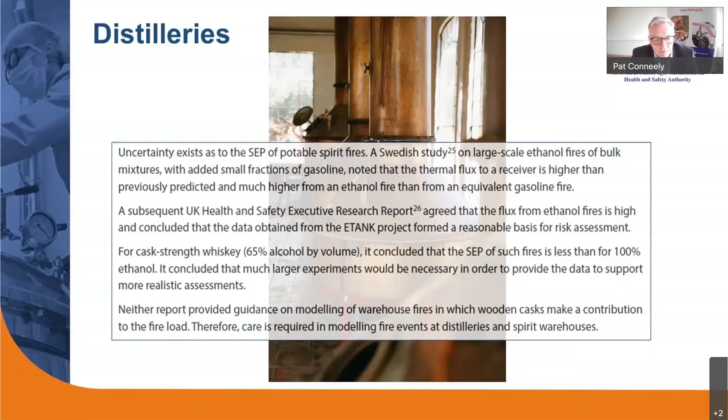Again, we emphasize this is for the standard model. For QRAs, a different approach could be taken, but we would require extensive justification for the use of lesser figures.

Ethanol is a flammable liquid category 2 at ambient temperatures, and the bulk ethanol scenarios reflect that. That's in table 66.

However, ethanol is at elevated temperature in a still, and those scenarios are similar to a flammable category 1. So a simplification is applied, and loss of containment events for reboilers, pumps, condensers and so on are reflected in the failure frequencies for the still loss of containment events, as seen in table 67.

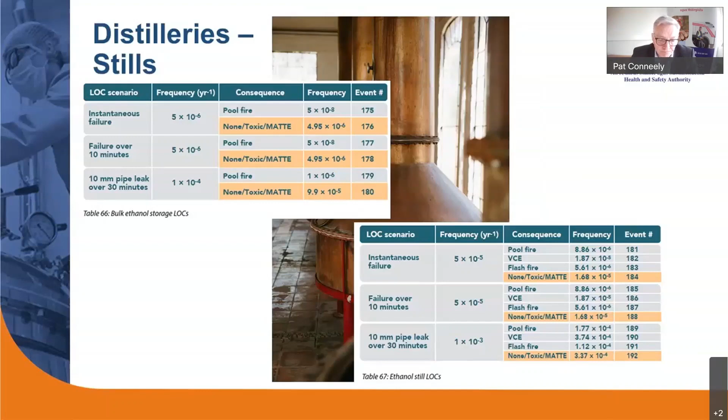For warehouses, lower fire start frequencies are used, reflecting the high level of security at these sites. Credit is also given for the use of sprinklers, but I should point out there's an error in that table, which should refer to per year, not per hour.

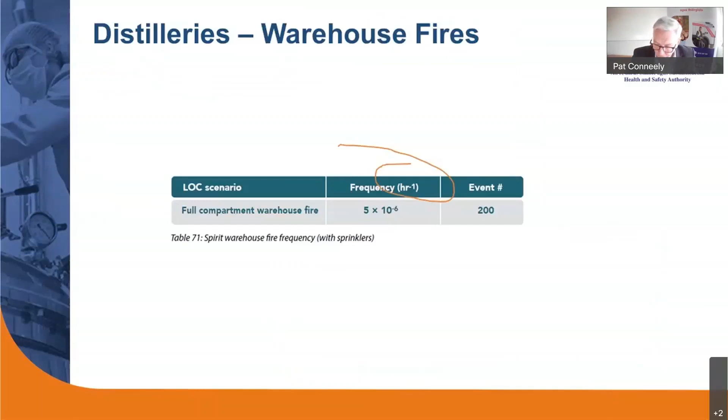So I might step back now from all the technical detail and look at the bigger picture. The standard approach for generating technical land use planning contours for planning authorities has been set out in the guidance, and it does make a number of simplifications, ensuring a robust approach that will be carried out efficiently and at a reasonable cost.

As Isa mentioned already in her presentation, the costs will be borne by the operator as set out by the COMAH Regulations of 2015. We are tendering externally for this, and the tendering process has commenced. When a successful tenderer is appointed, I think any kinks in the approach will be ironed out at that stage, if there are any.

Part 3 of the guidance is amenable to technical change, and it's explicitly stated in the earlier part of the guidance that Part 3 can be changed without further recourse to the board. So it does allow us to make practical changes as we proceed.

If there are any inconsistencies, or if new technologies develop — and we pointed out earlier that in some sectors we're still looking at technologies that might come in and how that might be applied in Ireland — these can all be incorporated in the future through a much simpler, shorter process, hopefully.

In terms of the actual rollout of the generic advice to the planning authorities, it's difficult to say how long it's going to take, but it would be nice to get it done in 3 years — that would probably be on the optimistic end — though it could be up to 5 years. Given that land use planning provisions have been in place for more than 20 years now, and we've still had a lot of difficulty rolling it out, it's worthwhile to try and get this done. Even if it takes a few years, at least at the end of that it'll be done for all sites.